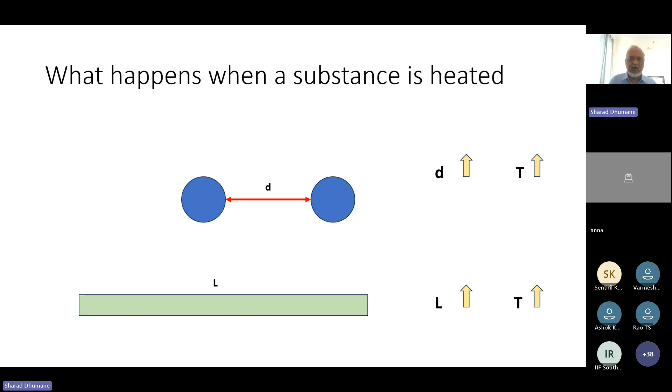Suppose we take a bar of length L, and when we raise the temperature, the length L also increases. So basically, whenever heat is applied to a material, the material expands, the volume increases. This is what happens whenever a substance is heated. There are few exceptions, but generally this is the norm, and it's applicable to our subject today.

So what is shrinkage? Now we understand that when we heat a material, it expands. When it becomes liquid, it expands even more. The atomic distance is much more in liquid than in solid, so naturally the volume of liquid is much more than the volume of the same solid.

If we consider that liquid has weight W, volume V1, and density rho 1, and in solid the weight remains the same, volume is V2 and density is rho 2 - will the liquid density be lower or higher? Liquid density will be lower because the volume has increased. So density of solid is more than that of liquid.

This is very important. So what happens when the liquid of volume V1 becomes solid: the weight remains the same, but the volume now changes from V1 to V2, and the density changes from rho 1 to rho 2. V2 is less than V1. This is important - the volume of solid is less than the volume of liquid.

This is the point where our problems start - the mechanism of shrinkage. Because the volume of liquid is more, when it becomes solid it shrinks, and that difference between the two volumes V2 and V1 is called shrinkage, or solidification shrinkage. This happens for almost all alloys and metals - when they solidify there is a reduction in volume, called solidification shrinkage. Whenever a liquid becomes solid, there is shrinkage involved, with very few exceptions.

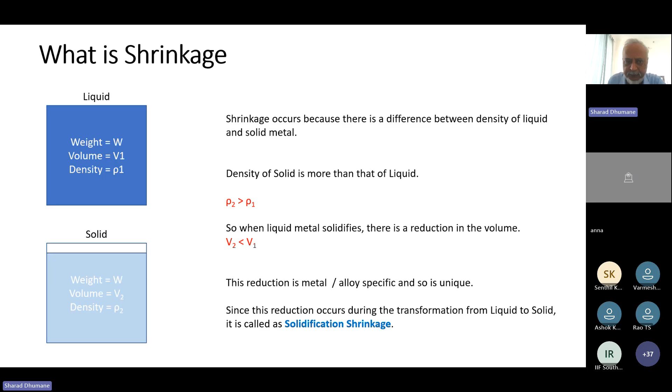Coming back to ductile iron - it solidifies differently. It's not like steel, stainless steel, aluminum, or copper alloys that simply go on becoming solid where the solid volume is less than liquid volume. That doesn't happen in gray iron or ductile iron. So how does it solidify differently?

Here there is a phase diagram. You can see this is the liquid point. Our material has been heated to this point, and from this point it starts cooling down. On this diagram, this is the percentage carbon, and on this scale there is the temperature scale. For this particular chemistry and carbon content, we are at this point, and the metal is now solidifying.

At point A, it starts becoming solid - the first nuclei of solid start forming at point A. From point A to point B, it goes on solidifying: the liquid volume decreases, the solid volume increases, and at point B the whole material converts into solid content of different phases. So solidification happens along this particular line - it starts at point A and ends at point B. At point B, everything becomes solid.

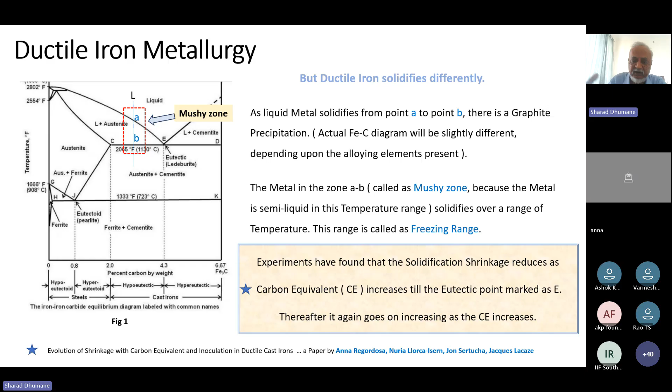This particular observation, there was a paper, I think a very important paper. I have marked it with a star and given a footnote here: evolution of shrinkage with carbon equivalent and inoculation in ductile cast irons, a paper by Anna and co-authors. I think it is a very important paper, and there are few findings which we will continue to discuss in next slides.

So now we have understood how ductile iron shrinks. It shrinks in a mushy zone. There is a freezing range. As carbon equivalent increases up to 4.3, that freezing range goes on decreasing, and the solidification shrinkage goes on decreasing. Then after 4.3, it increases. So now we have understood some information about ductile iron shrinkage.

So now the question is, how much is the shrinkage? Since shrinkage is variable, we can't really say ductile iron shrinkage is so much, because that depends on carbon equivalent. To be more precise, it also depends on the presence of other materials like silicon, manganese. When we collect experimental data of those particular phases at different temperatures, whatever carbon equivalent diagram we see is a very simple, primitive phase diagram. But when we add manganese, silicon and other alloying effects, it becomes a complex phase diagram and more accurate. Then I think we will come to know our shrinkage more accurately.

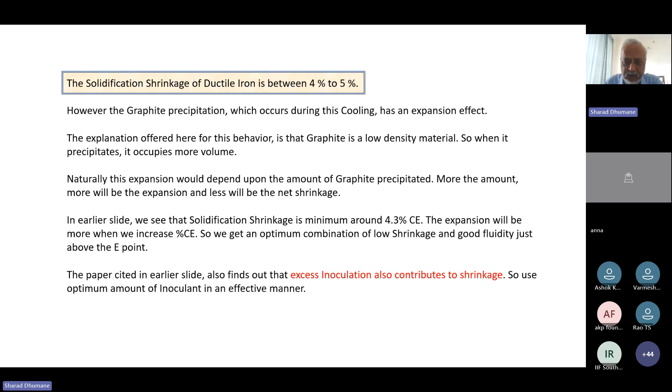So, the difference between shrinkage and contraction.

This is something very basic, but I think it is important that we discuss this. Here, this particular graph, on the y-axis it is volume, and on the x-axis it is temperature. So when you plot a cooling curve, as the sample cools down, there is a volume change. This is actually a cooling curve. As the temperature drops, your volume also drops. So when you see a cooling curve like this, starting here, this is your pouring temperature. So from pouring temperature to your room temperature, or whenever it becomes solid, you draw that cooling curve, and then what do you see?

Here it starts solidifying. Since our ductile iron solidifies in a freezing range, in a mushy zone, the solidification occurs over a temperature range. There is no single temperature at which it solidifies - it solidifies over a temperature range or solidification interval. So that interval is like this: here at this point, it starts solidifying, so this is your liquidus temperature. And here at this point, it solidifies completely, so this is your solidus temperature. Between these two temperatures, it solidifies.

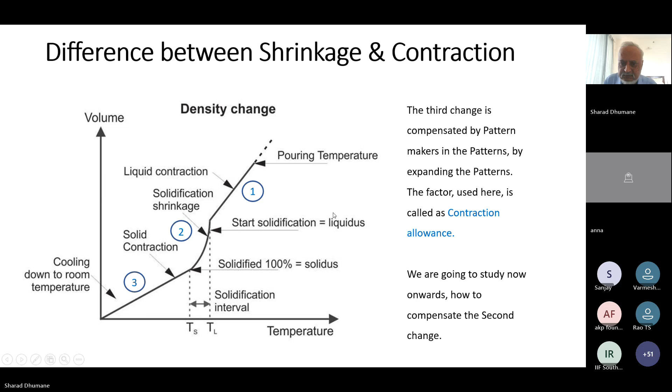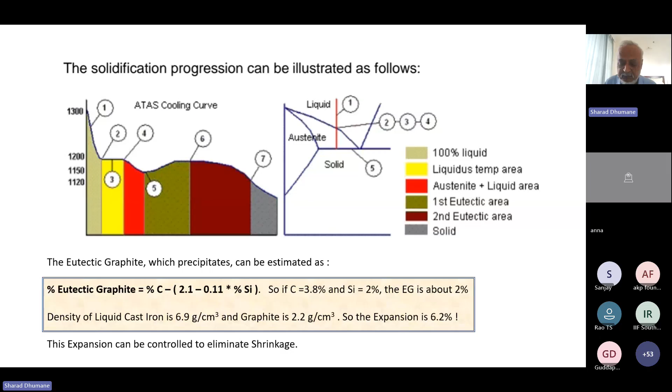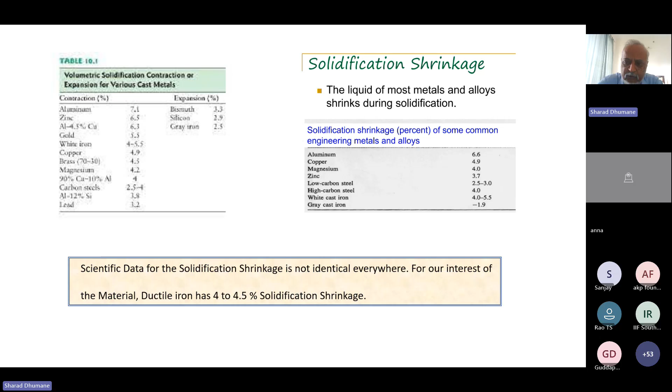There is another reference from another site on solidification shrinkage of different materials. Aluminum 6.6, copper 4.9, magnesium is 4, zinc 3.7, low carbon steel 2.5 to 3, high carbon steel 4, things like that. So scientific data for solidification shrinkage is not identical everywhere. That is what I would like to mention, but it is fairly in the range of 4 to 5%. That is what we should understand, keep in mind, and move ahead.

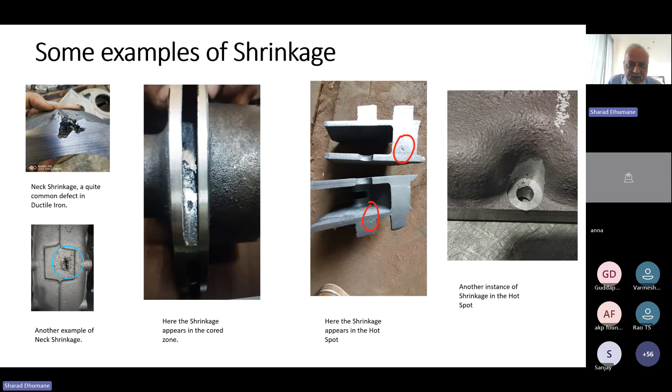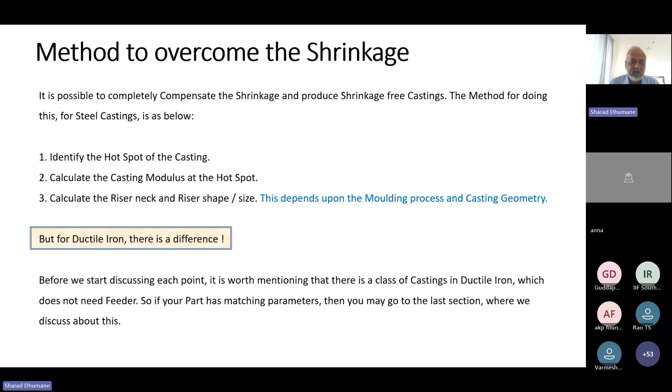But it happens under certain conditions. When we talk specifically about designing feeders in ductile iron at some other point of time, we'll come back to this. Right now, just understand that ductile iron behaves very differently. If you understand the behavior of ductile iron, then we can work on it more efficiently, more effectively, more successfully. That is the whole point of mentioning this particular property here.

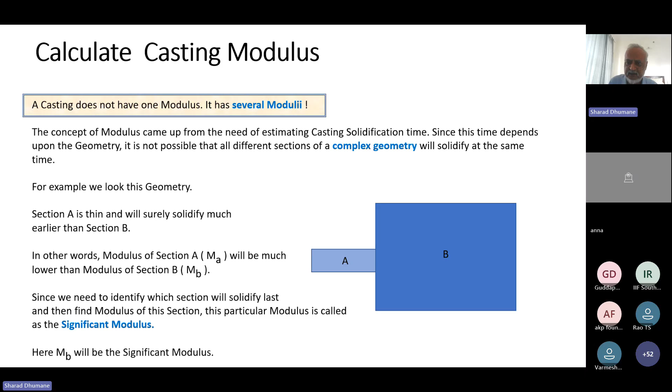So this is the understanding when we calculate modulus. Many in their working terminology call MB the significant modulus, because that is where we have to take action, we have to design the riser. So that is the significant modulus, it is affecting our process of metering.

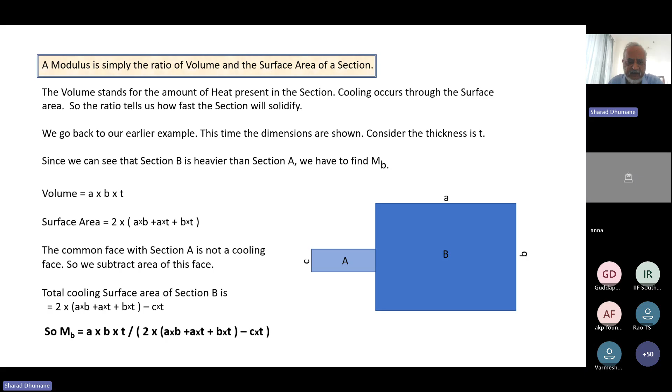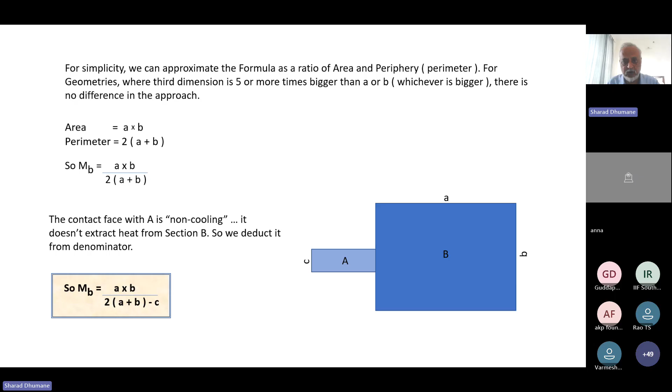So here again, I have just explained the formula of the modulus. When a section is like this, modulus is A into B divided by 2 times A plus B, and minus C, where C is this area. So this is the formula, and there are many more formulas. You can get those formulas and use them to calculate modulus yourself, understand how it is calculated.

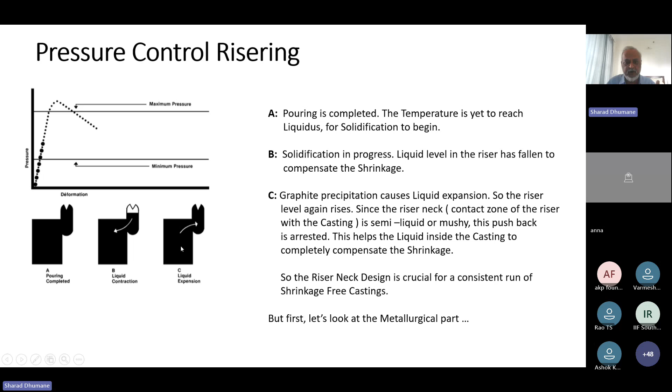So the neck has to solidify early so that the expansion doesn't allow liquid metal to flow into the riser, and then it compensates the solidification shrinkage which is happening in the casting. This is the point which I'm trying to make clear here.

For that particular process to happen, the neck modulus should not be more than 0.6 or 0.7 times casting modulus. When neck modulus is higher, there are quite chances that the neck will not freeze in time, and it will allow the expansion and the subsequent metal to go into the riser.

And then when the solidification is getting completed, it solidifies and then doesn't allow the riser to fully compensate the shrinkage. So if we keep the neck modulus of correct size, correct design, then we are able to take the benefit of the graphitic expansion fully, and we are able to compensate the solidification shrinkage in casting sections fully.

So I think this point is worth repeating again and again, that neck modulus should be in the range of 0.5 to 0.6, sometimes 0.7. But with more neck modulus, we run into the risk of neck shrinkage.

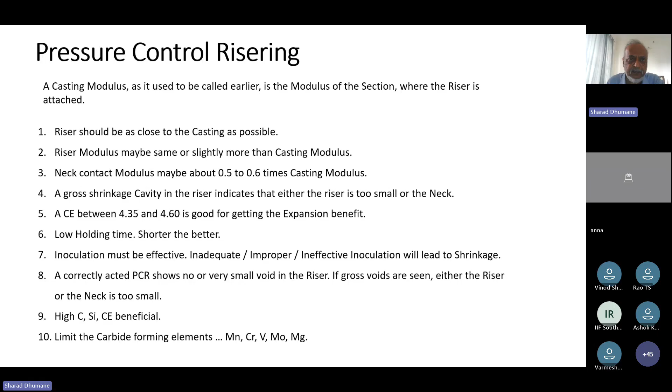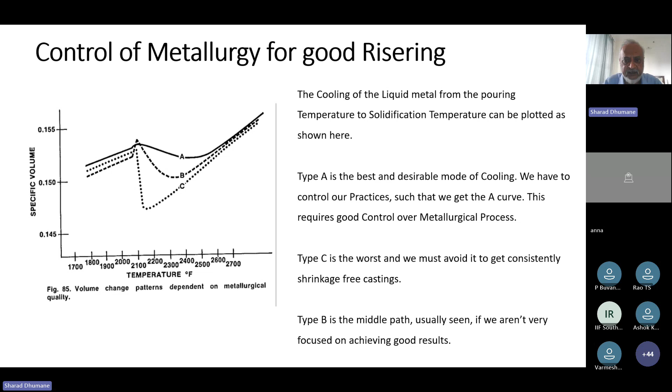Okay, so now naturally you will ask me what we should control.

So the first control is charges. Please use clean, rust-free, oil-free charges, because if you are melting rusty charges, then you are already adding liquid slag into your melt, and it is going to exacerbate, it is going to aggravate, it is going to increase your risk of shrinkage defects in your casting. So this is very important, because this is something which is definitely in your hand. If there is a rusty charge, then you can control getting it melted. You can control getting it clean, ensure that it is rust free, and then only add. So this is something very much in your hand, and you should do that.

Melting time should be as low as possible. Melting time and your melt quality are very much related, and the more your melting time, the more your melt quality suffers. So when your melting time is very high, you understand that yes, something must have gone wrong. I don't know what has gone wrong, but I must take some action on my melt quality. So melting time is another thing which will give you an alert, like a buzzer, that yes, you have melted in the correct time, so please don't worry and go ahead. But if your melting time was long, then something was wrong, something needs action—see what is wrong and then take action.

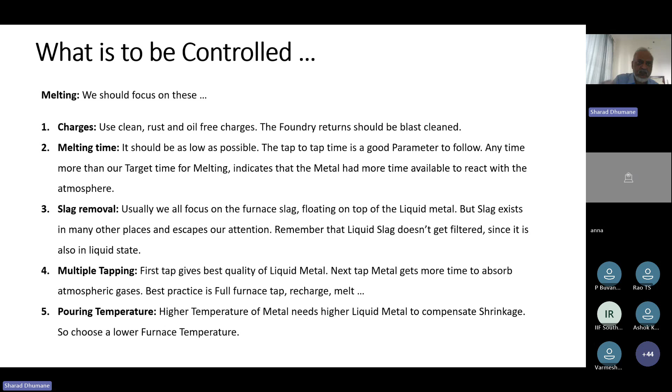So these are the five points we discussed which impact your melt quality.

Composition. This is not really in your hand because we are making a particular grade. We have to deliver certain properties and show these in our casting, tensile in our test bar, hardness on our casting. So we really don't have much of a choice, but as far as possible, go for something which gives you

less chances of getting liquid slag affecting melt quality. So there's a small window here which you can control, but not a big one. But for all the earlier points we discussed, you have a good amount of window there, and I think you should exercise control in that window.

Pouring: I think mechanized pouring is best, because manual pouring will have some variability, and whenever there is variability, something definitely happens. Quality variability is the biggest enemy of quality. So if something is variable, we are inviting some quality risk. Mechanized pouring is best as far as melt quality is concerned.

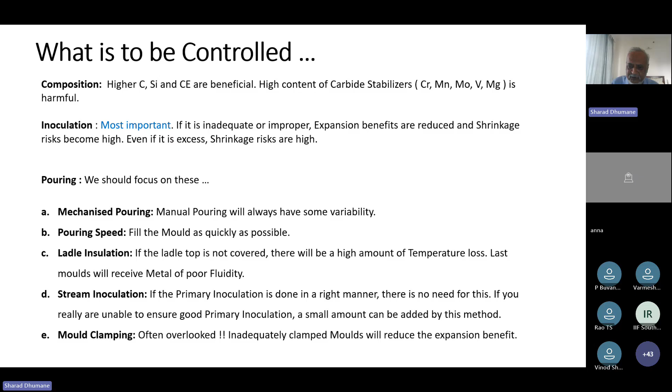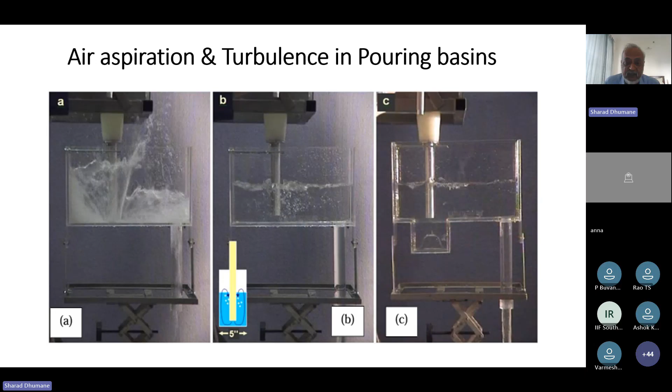When these air bubbles go inside, the popular Campbell theory talks about these air bubbles or bifilm. This creates the source of microporosity and pinhole porosity in our casting. These are related to your melt quality, because even after taking all those safeguards, during pouring there can be violent turbulent flow, and then your metal gets oxidized—reoxidation. This creates air entrapment and a risk of defects, and these are more harmful because they lie subsurface and are opened after machining, so these are more harmful than other defects.

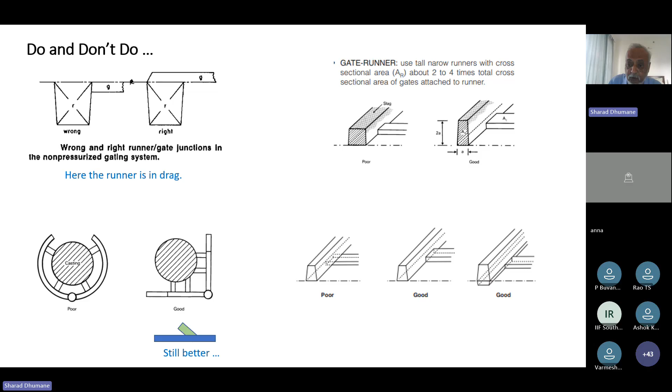Good practices—this is a poor practice. Why is this poor? Because we have attached a runner into the riser, which makes the riser a hot riser—traditionally called a hot riser. But why is this poor design? Because in many cases, the riser neck is designed for a cold riser, and when you add a runner into the riser, it increases the time the riser remains in liquid state. When the riser stays liquid longer, it affects your riser neck. So the riser neck, which you had calculated as 0.6 times casting modulus or 0.7 times casting modulus, changes because now the riser has become hot by adding the runner into it.

So the good practice, the safer practice, is to go like this—this remains consistent, so whenever you pour, the riser behaves consistently. This is a small factor that many people do—I have also done this—but you have to understand the risk. When you understand the risk and do this, I think we take more care. So when you attach a runner into a riser, you have to work on the riser neck. If you alter the riser neck when attaching a runner into the riser, then you have taken care of the risk and can continue working like that. This is another important point.

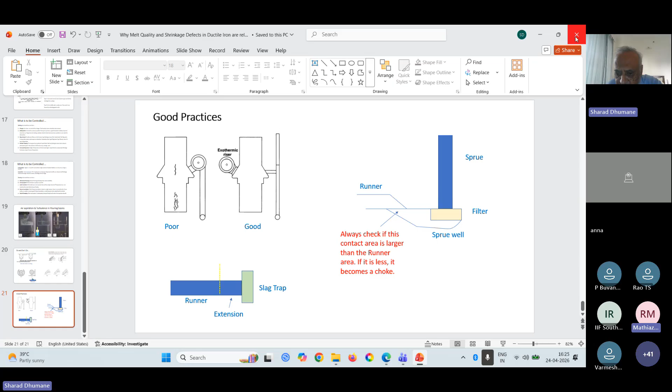Sir, there are a few questions in the chat box. Chat box, okay, yeah. So, what is the root cause... one minute, yes, yes.

Okay, let me open the chat. Sir, Mr. Prathamesh has asked what is the root cause of neck shrinkage.

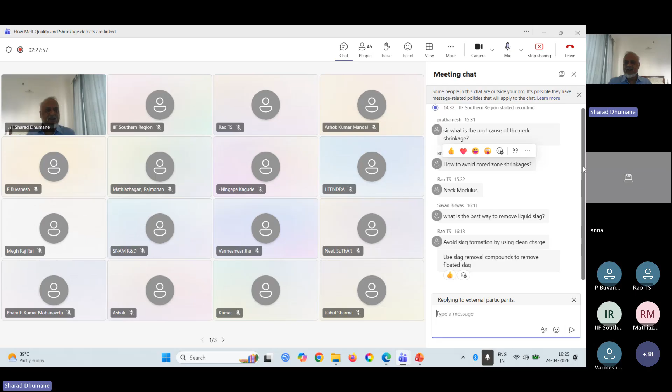Neck shrinkage happens because of expansion. In ductile iron, there is an expansion, so there is a reverse flow from the casting into the riser during solidification, during expansion, during graphite precipitation. If your neck is not correctly designed, it remains open during this reverse flow, allowing flow of expanded metal into the riser, which we don't want. We want the expansion benefit to stay inside the casting. So the root cause of neck shrinkage is an oversized neck.

Okay? Understood? Okay, so I'll go to the next question.

How to avoid cored zone shrinkage? I think this is a good question.